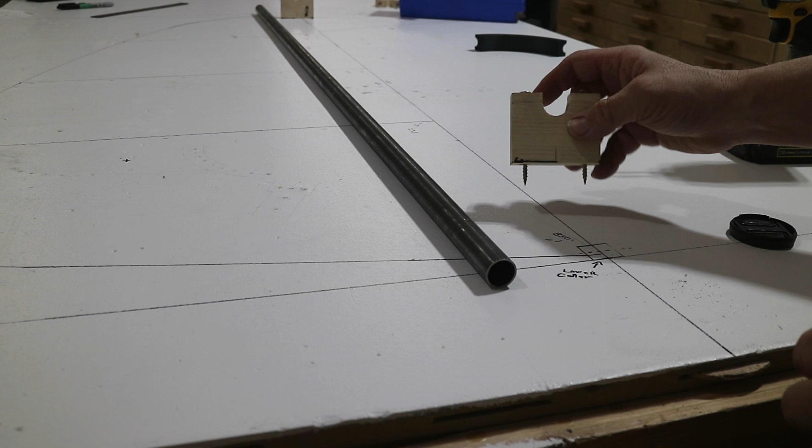I'm going to just use the same blocks I used for the elevator and horizontal stabilizer work to set this, since the tubes are the same size mostly. This is 7/8 and these are 3/8. So I just line up my little match mark right on the line. Get the one on the other end and I can put the tube in it.

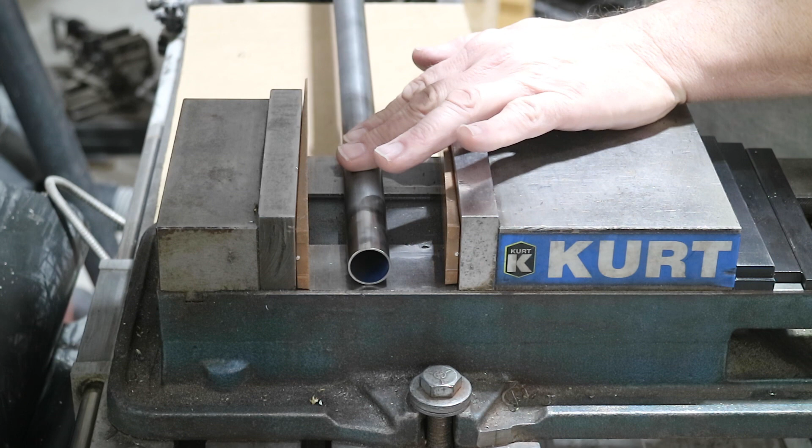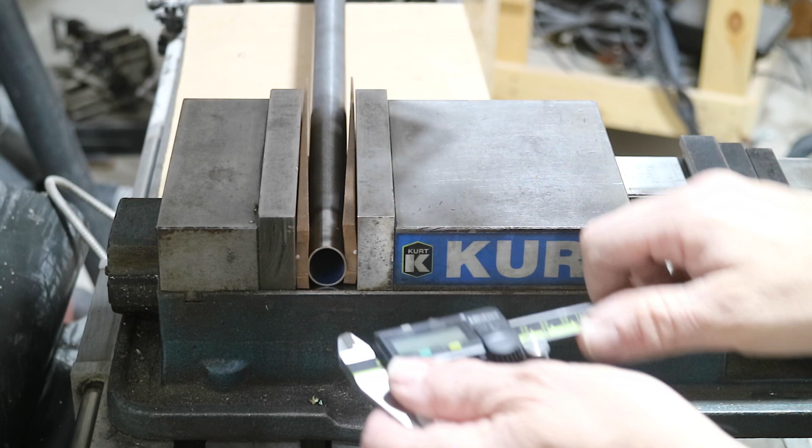So, one of the first steps here on the center tube is to crimp the end down to 5/8, so it'll match up with the tube coming around. So I just got my vise set up with a couple contractor shims for windows and doors. And I'm going to crimp it down until I get to 5/8. Well, a little extra. Almost there. Alright, so with that end crimped, I'll just put this guy in place and start working from there.

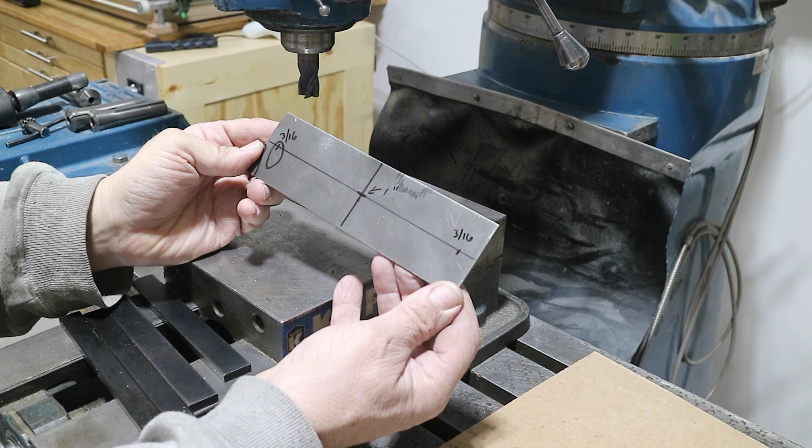Next up, I'm going to work on the rudder horn. So I blanked out some 90 thousandths, my scarf joint, and the little collar that goes on the bottom. So I'm going to take this guy to the mill and put the critical holes in it. So I got a blank of 90 thousandths material, a little wider, a little longer than necessary, and I've just found center where I'm going to put the 1-inch hole. Put some references on there so I don't do anything dumb. Drill this hole out, drill these, then open him up to 1 inch.

And here's the tube that has to go in that hole, so of course it's going to fit, but checking to make sure I'm not doing anything dumb.

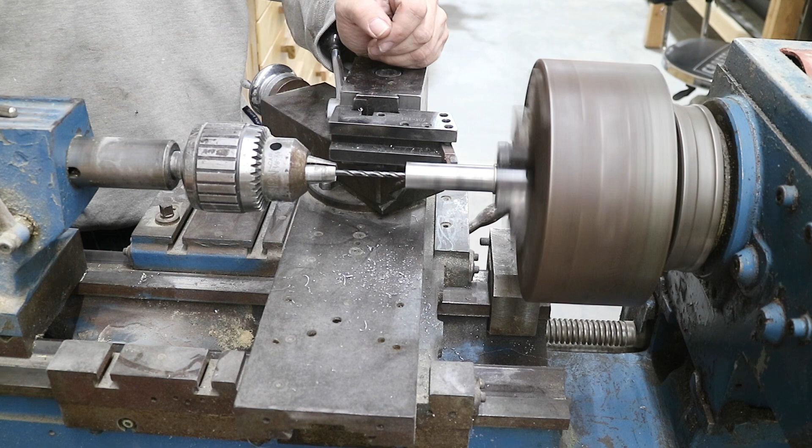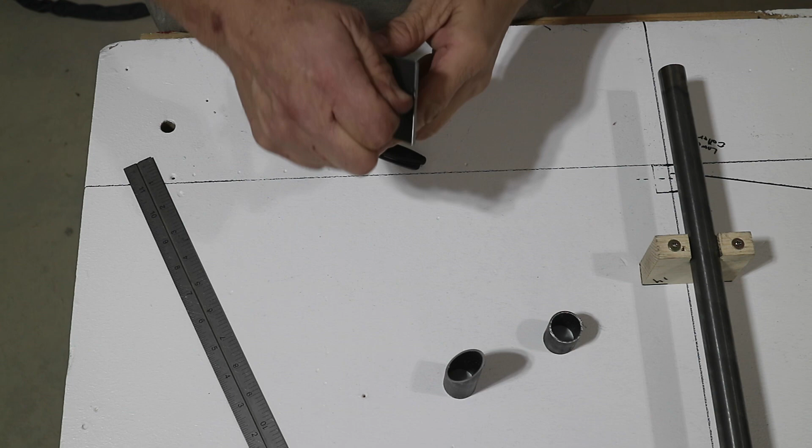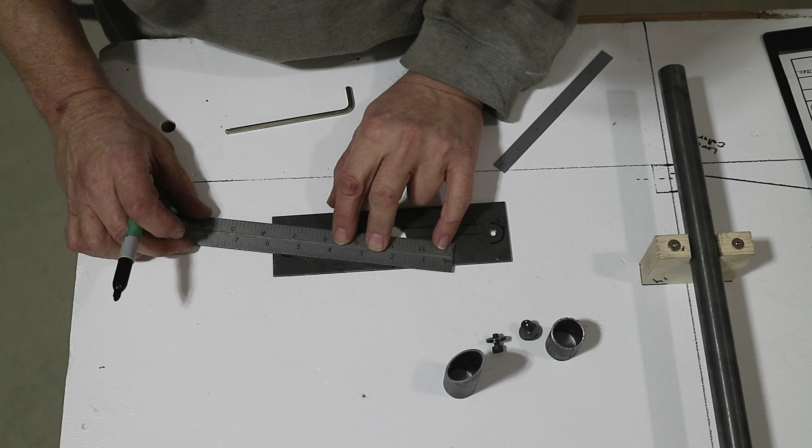Continuing on this rudder horn, so I've made the two washers and put a 3/16 screw through them so that I can mark out what shape this has to end up at. This is the bend line for the tabs that'll go down here. So all I got to do right now though, draw the arc around these. Take these washers off. I just need to bring that back to the center line. Now it's time for some work on the bandsaw.

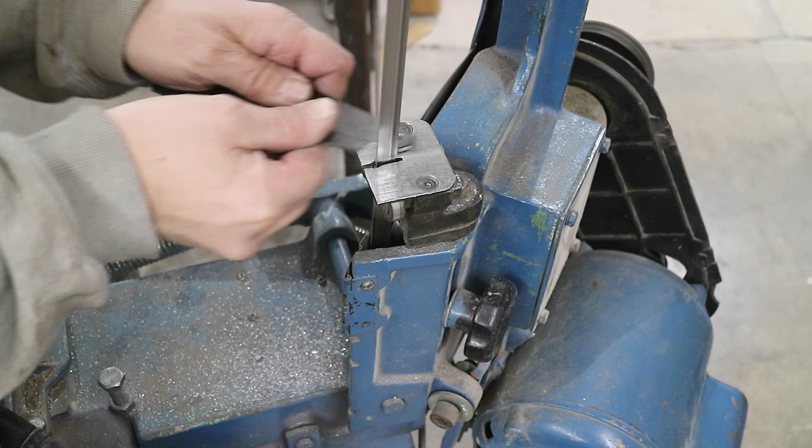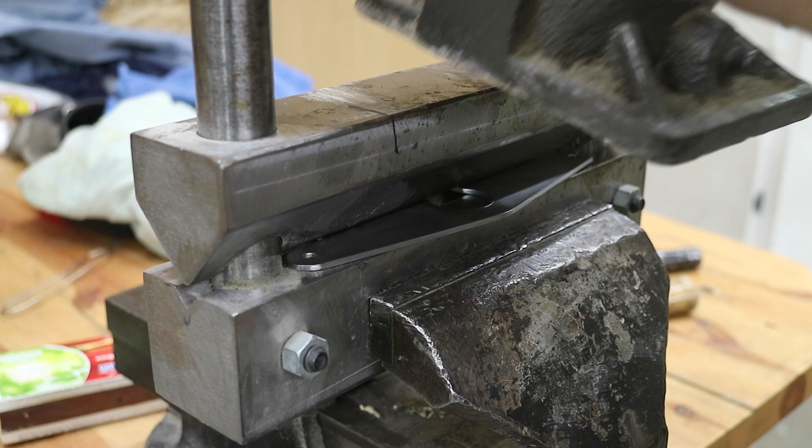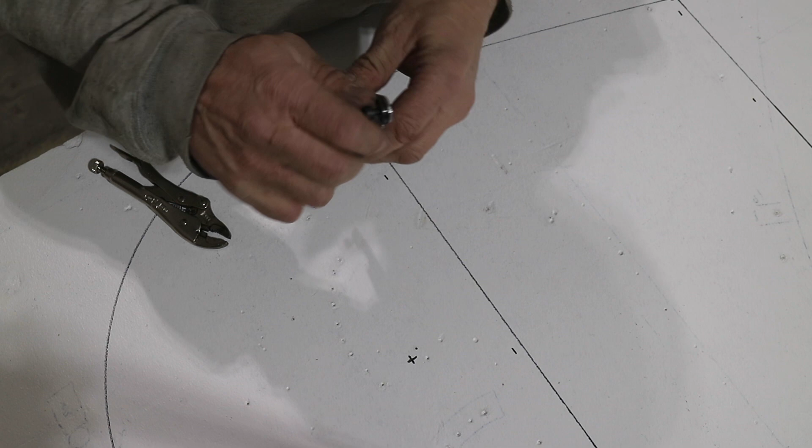Alright, so I cleaned it up a little bit, took care of the edges, got close on the outside corners, but those are going to get welded, so I'm not too worried. So now I'm going to bend this flange. Alright, so with that all formed, I'm going to weld these washers on. So I'm just going to use these screws to hold them down. Weld them and then clean up the end.

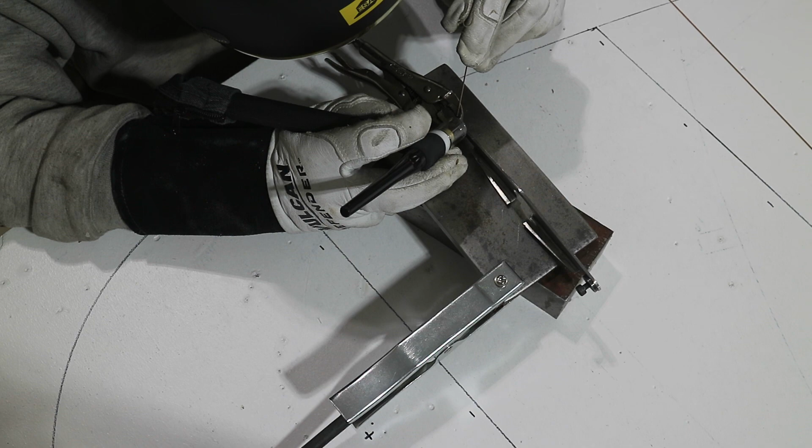I'm going to fit this tube to this and then weld it. So I've got a center mark on the hole. I want one down the back side of this because it goes that way. So I'm just going to eyeball down here where it actually is on this side because it's easy to see. Carry it over. And then I'm going to set it down the table and roll it over just until this marker hits that line. And I can just roll it across. And now I've got that line down here. Now I can just line them up.

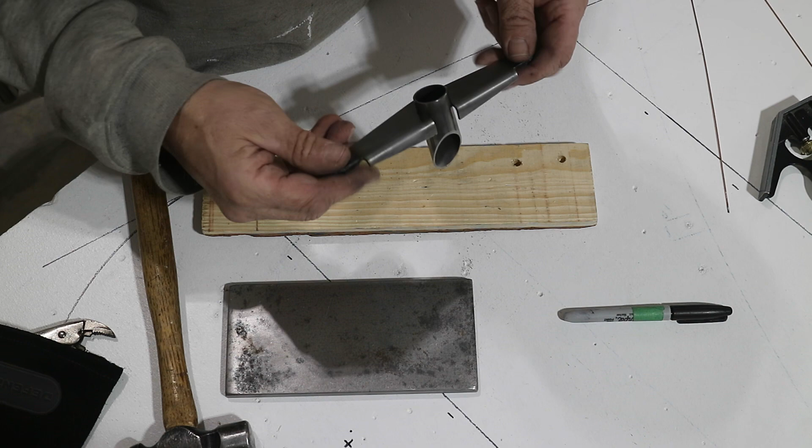Alright, I got that tube in there. It's lined up on my line here that I put on. And it looks very square. Should be. Yep. It's the correct relationship as far as the cut is towards the ears back here, so I'm going to go ahead and tack that in place.

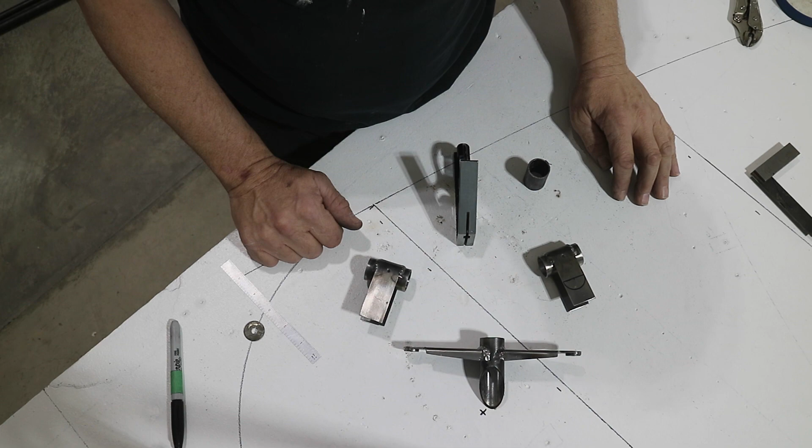Alright, I'm getting all the little pieces that have to go on the leading edge of the rudder before you could lay in the trailing edge and weld the ribs in and stuff, because all this will be captured in there. So I've got the horn, it's done. I took a reamer to the inside and cleaned it up so it fits over the shaft nicely. I have the hinges for the rudder, which I fabricated when I did the elevator.

But what I'm going to do now is radius this end here. So the hinge, once it's on there, can't come off anymore, so it'd be very difficult to do that later. But we can't put the hole in yet because the hole will be drilled through the other tubes. So anyhow, basically I have the dimension, which I think is 1 5/8 for the center. I'm just going to lay out the center line. Take my washer, square it up on the center line. Then I'll nip off all that extra material and make that contour.

And then all that has to be done on this when it goes on the actual fuselage will be to match drill it. One other piece to make is a little 1-inch spacer, so I've got it blanked and I will trim it down, and it's got a hole in it too, drill the hole.

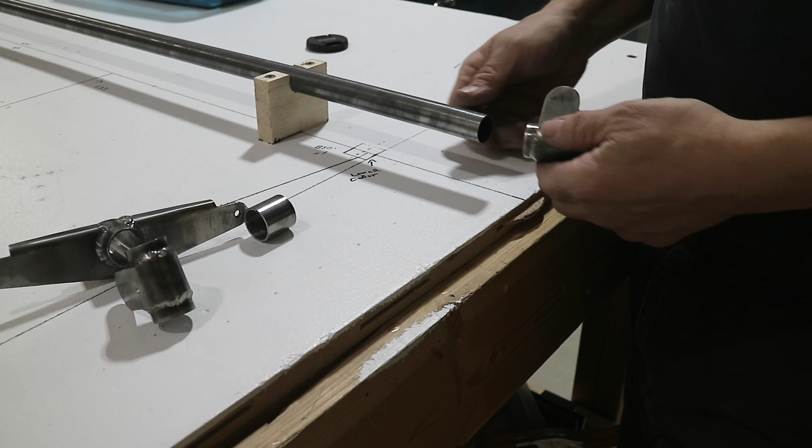So this leading edge for the rudder here, it gets a hinge. It's got to go up there in between the ribs, and it gets the horn, which will go that way, but for right now I'll put it sideways. Then it gets the hinge and a collar.

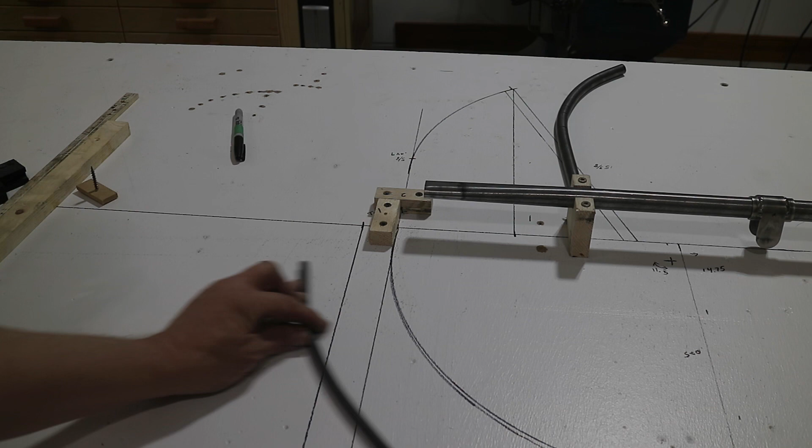Rather than, if you don't do that, you end up always saying, oh, slide it this way, it looks a little better. Slide it that way, it looks a little better. And you mess something else up. So there's my two stop blocks. I can bring this in here, hold it up against there, and then just work down the line.

So I finished bending the 3/8 trailing edge here. It looks good, fits the line well. It's got a little twist in it I got to take out. I'll work on that in a little bit. But as you can see, it's short down there on the end. And I knew it was going to end up short.

Basically, when I did my bulk order of tubing, I couldn't get this. And so I had to have it FedExed. I ordered it in 6-foot lengths because I'm cheap. So I'll do a scarf joint down there and add about 12 inches on the bottom down there.

So I've got this leading edge 5/8 tube and the back tube bent into a reasonable shape. So one thing I'm going to do now is I'm going to notch the end of this tube so that these two will line up evenly out on the outside. And then I'm going to cut it to length so that I can weld that small little bushing that goes on the end in place. Because that's where the lower tube, this 3/8 on the bottom, mates up.

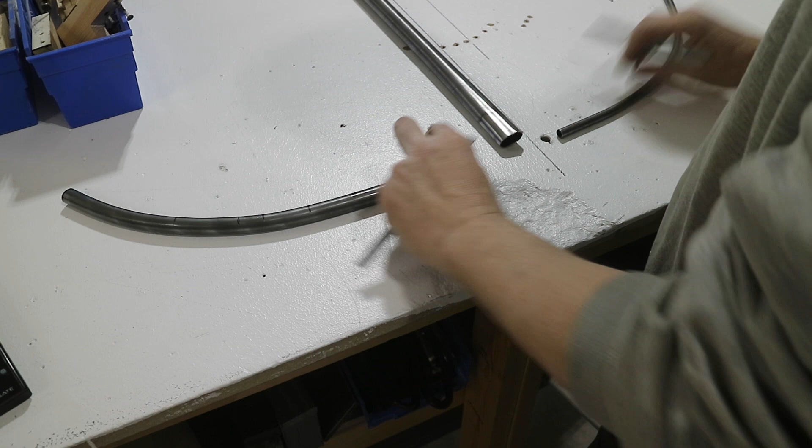This isn't very critical. I'm going to put a line down the center of this tube, just a reference line. It looks like it's about 1.25 inches across. Nope, 1 1/8, I'm sorry. So there's the center. I'll take it down. Just eyeball, it would be plenty good enough.

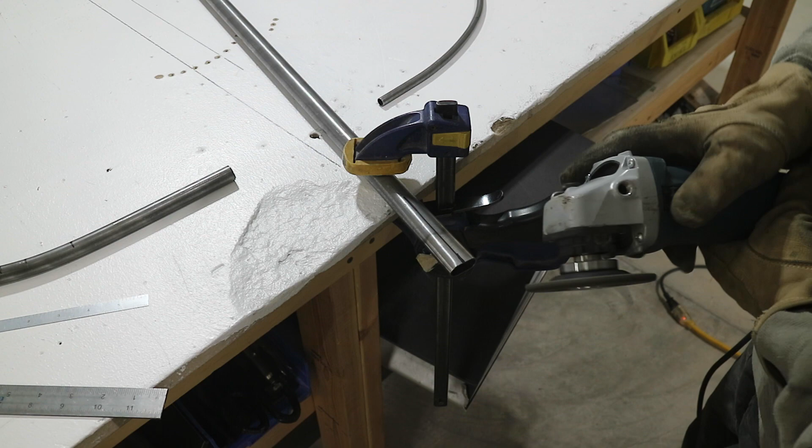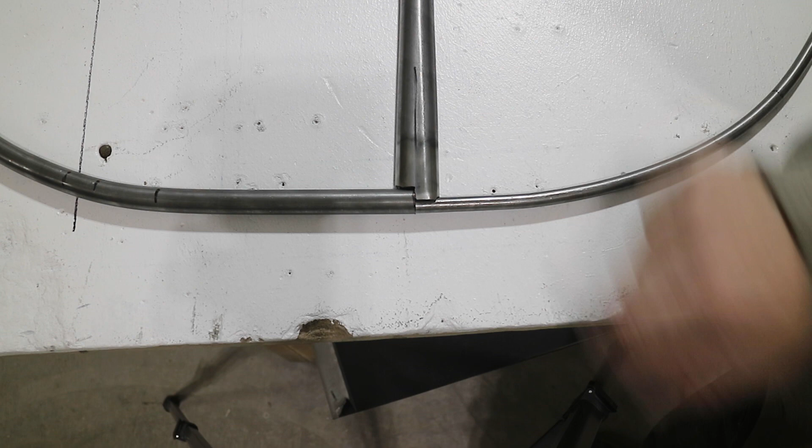Alright, so obviously this guy here, all we have to do is do a little fish mouth here. This guy here, we're going to have to remove. You don't have to do any major math. You can just see the difference there in the two tubes. So after playing around with the grinder, I got a pretty good fit up. Happy with that. So now I'm going to put this into the jig and determine the length of this tube.

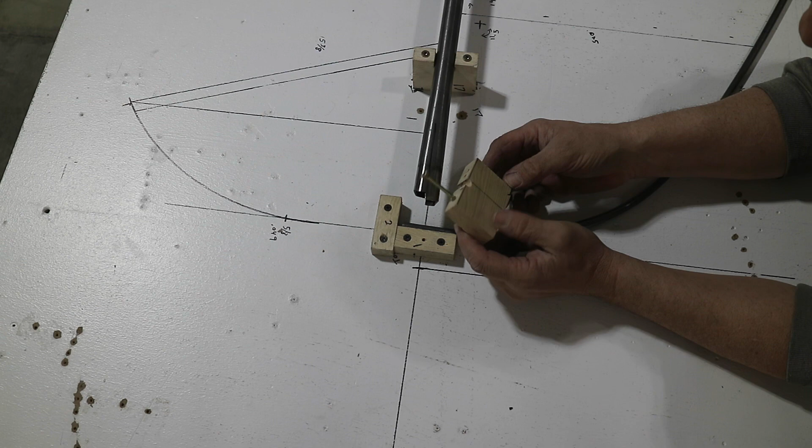So one of the easiest ways for me to get this length right will be to put this tube in place and put this tube up on its standoffs. And I'm going to use the exact same standoffs I used for the elevator. So they have a line justified to the side of the tube holder here, so that this line is the outside of the tube, which is the way it is on the print because they give you outside dimensions. Here we're working from a center line, here we're working from the outside line.

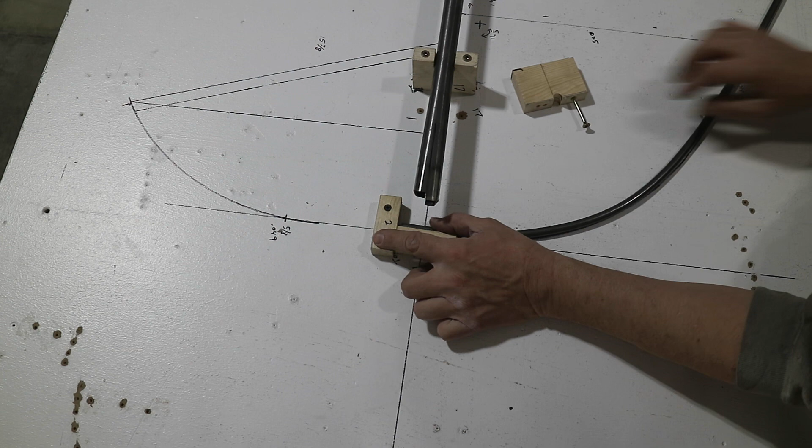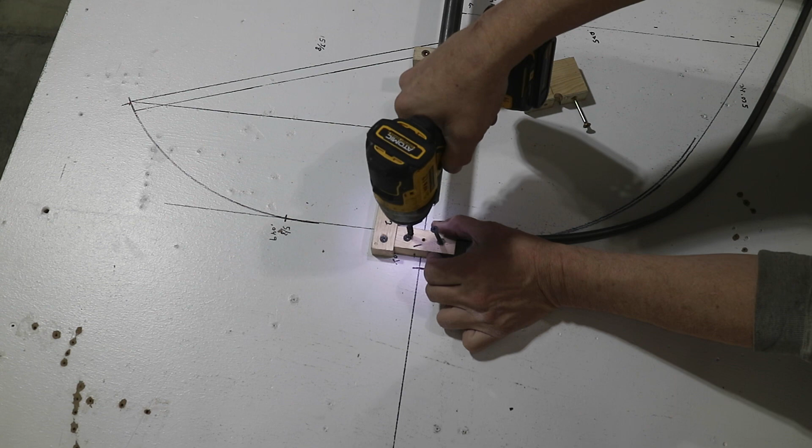So anyhow, I have these blocks in the way, which I used when I was bending this tube to give it a home position. So now that it's done, I can get rid of them. One thing that always happens with this table is when you put screws in, you create a little pucker under there. So I just keep a cold chisel nearby and I just take those off so I have a nice smooth surface to work from.

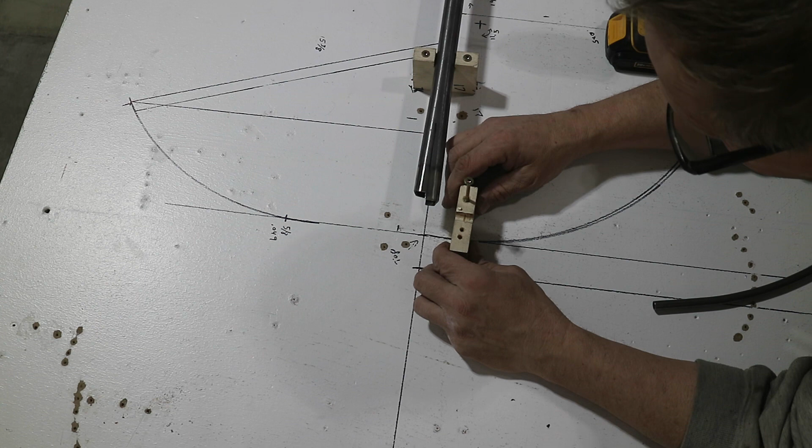The first thing I'm going to do is line that line up there and put it very close over here and screw that down. And this will give me... also going to get rid of that pucker I just made so that this guy will sit down nice. So now that's the start of it. I'll put the rest of those on there, and then that pushed up to here will give me the actual location for this tube.

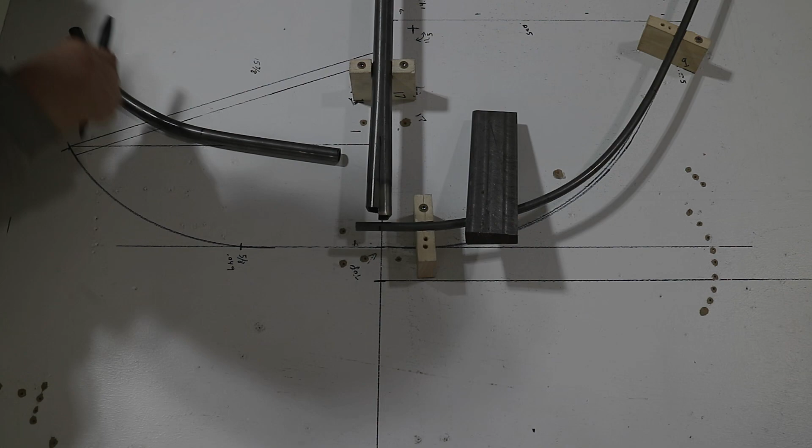So with this tube sitting in its cradles, I'm just going to mark the center line up to this tube and cut it off. So now with that clipped off, I'll just line it up on the center line. Little clamp on it. Now I can bring this guy up and start working it.

With the top set in the right position, I can put this collar on and locate it. But nothing can be put on this tube after this because that end is crimped and this end will have a collar. So you've got to put all the hinges on. And this rudder horn, which keeps this hinge down here from moving along the shaft. So now with all that on there, we can put the collar in place and tack weld it.

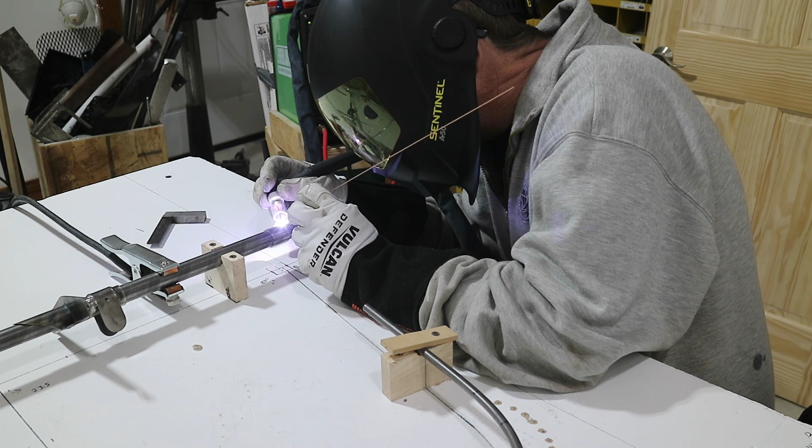So I've completed fitting up that rear tube into place. This has been cut to length. So the next thing I'm going to work on is this front rib. In order to put this tube in the top, I really kind of need that rib to kind of set location. So I'll make that guy up.

So I've got my ribs out of the router, clamped the blank in between them. I'm going to go make a profiled rib. If you want to see how to make profiled ribs, watch my video on horizontal stabilizers. In there I cover it in great depth.

Alright, so I finished making this rib for up here, this profiled rib. And so now I'm going to get this top tube, this 5/8 tube, tacked in place. So this smaller tube here is all lined up on its profile and it's locked in place.

So I can bring the center tube up till that touches nicely, and then I can bring this one over until it's smooth on the top and the elevation's correct by shimming it here. Get a tack or two on there, and then I can work on out here getting this rib in place. It's a little bit finicky.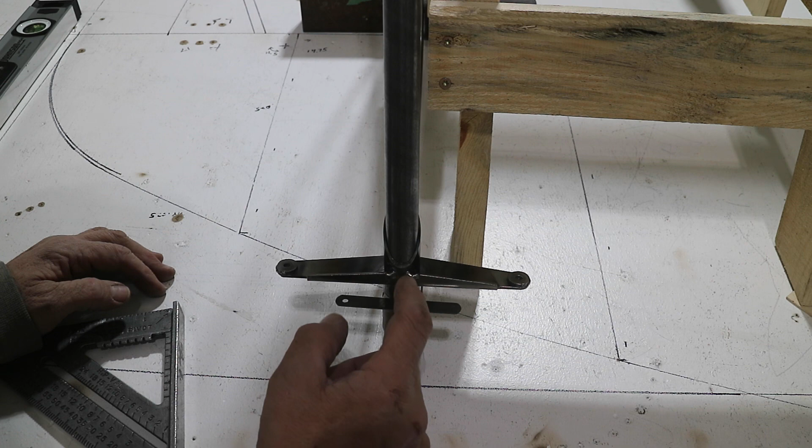Alright, so it's vertical and it's parallel. So now I want this to be parallel to this line because these are perpendicular. So first thing I'm going to do is put a 20 thousandths shim in here, and that's just to hold some gap between the rudder hinge and the rudder horn. I don't want that down tight, so I want to have a little bit of give.

So then I can take my square and reading on the scale down here, I can read back to where it touches the horn and get it even on each side. So right there looks really good, just a short 7/8.

So now it's 90 degrees to the tail. It's got some clearance for the hinge. I can go ahead and tack it in place. All right, that feels pretty good.

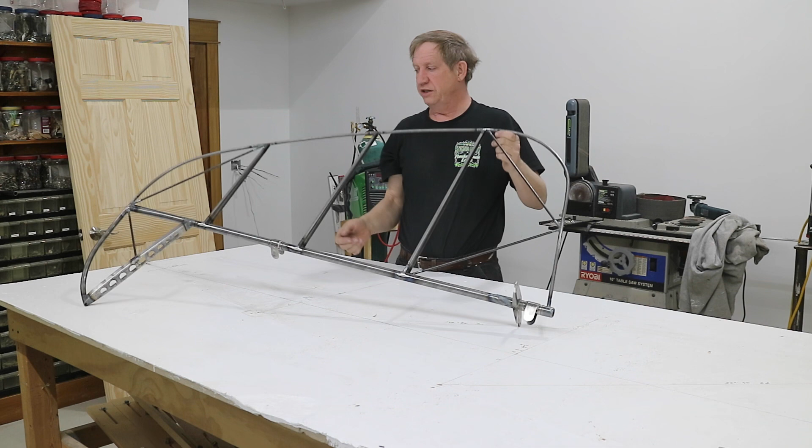So this is it for the rudder. For now, anyhow, it still needs the horn for the tail wheel and all that. But I'll do that after I decide what kind of tail wheel is going on it and after this is mounted on the fuselage. So I'm going to put this guy away and go on to the fuselage.